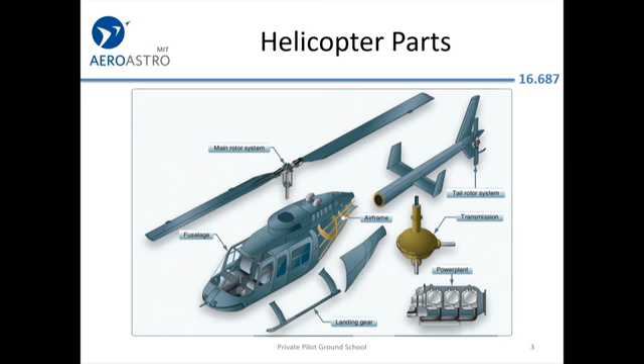You've got to have transmissions in helicopters. The speed of the engine is never the speed that you want, I don't think. And landing gear is kind of nice. Although for record-setting flights, sometimes people have taken them off to try to get a little higher or a little faster. And they just land very gently.

Okay, so your typical helicopter drivetrain will have transmissions for the main rotor, and they'll have another transmission to adjust the speed of the tail, maybe gear it back up a little bit. This unfortunately does introduce another source of unreliability. So in the airplane, you've got your engine, it's bolted to the propeller. As long as the engine's turning, it's hard to have a problem. The propellers don't generally just come apart in flight.

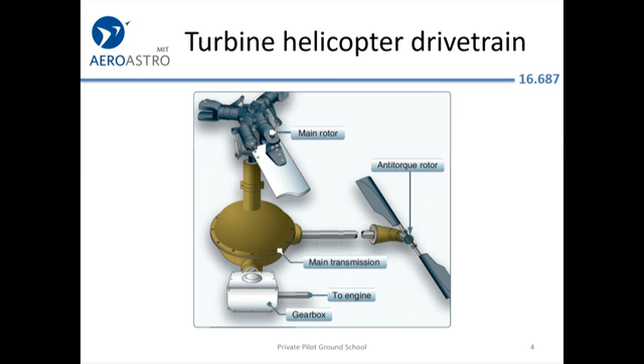But here with the helicopter, you might have a working engine and a working main rotor, and the transmission, all the oil might come out and the gears seize up. So there's a couple warning lights in there for when you're having a transmission problem.

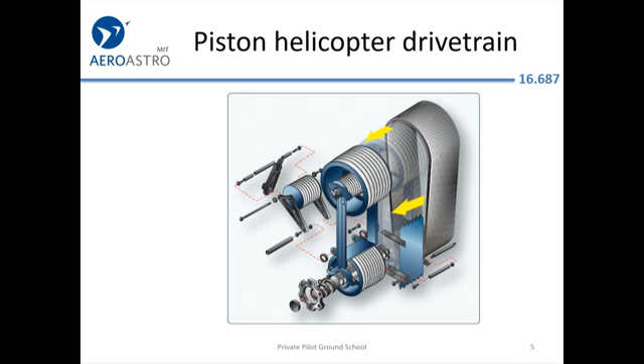This is the rubber belt system that's used in some piston helicopters. I think this is probably a drawing of a Robinson, but basically you have pulleys on the engine side and on the drivetrain side, and you have these rubber belts connecting them. So you can start your engine with the belts loose and then tighten them up when you want the engine to begin driving the rotor system. That way you don't have to have the little starter motor actually turn all the rotors and stuff.

All right, how does it work? So Tina is a hard act to follow with my cave person computer programmer's understanding of lift. But if you assume that lift is a combination of Newton's third law and the Bernoulli principle, that the sped up air has more kinetic energy, therefore, for conservation of energy, it has to have less of something else. It's going to have lower static pressure.

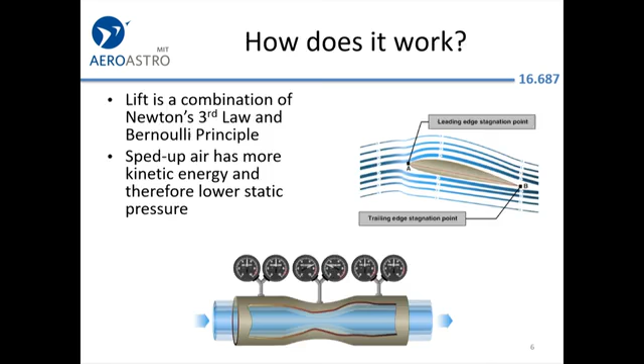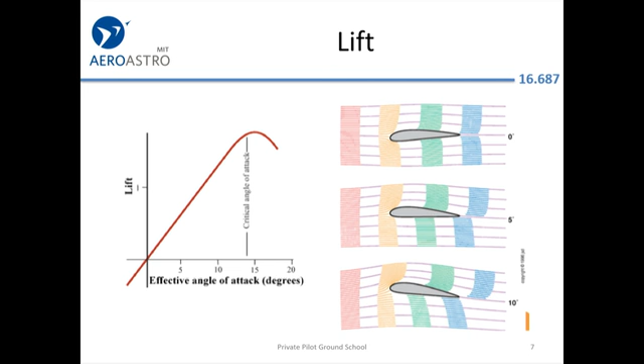This is the same drawing you saw earlier of how when you exceed a certain critical angle of attack, depending on the airfoil, your lift party comes to a quick end. It doesn't go away completely, but it's a sudden drop.

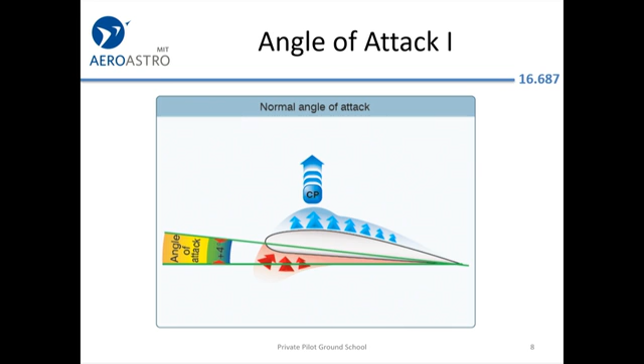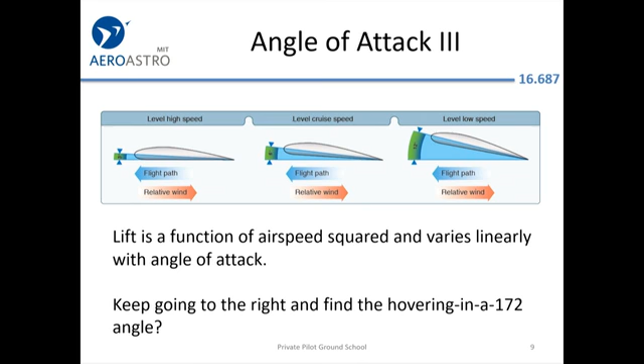Angle of attack. So remember, there's your chord line, there's your relative wind, a 4-degree angle of attack and a reasonable amount of forward speed will have you going. Remember, the lift varies as the speed squared. And if you want to fly slowly, you just go to higher and higher angles of attack. So why not hover in your Cessna 172 and save yourself the trouble of getting a helicopter rating? It's because, off the right end of this chart, you quickly get to the stalling angle of attack, and the plane doesn't fly anymore.

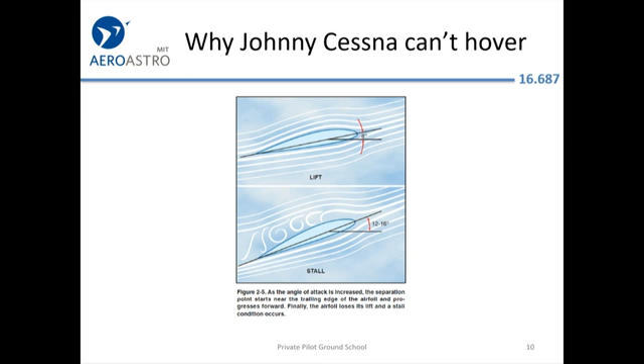All right, what if you saw the wing off the Cessna and spin it around? If you do that, the wing will always have airspeed, even if the fuselage is not moving. And that was an idea that was first reduced to practice in 1907. So only 4 years after the Wright brothers flew, a couple guys in France were actually hovering a little bit in a helicopter.

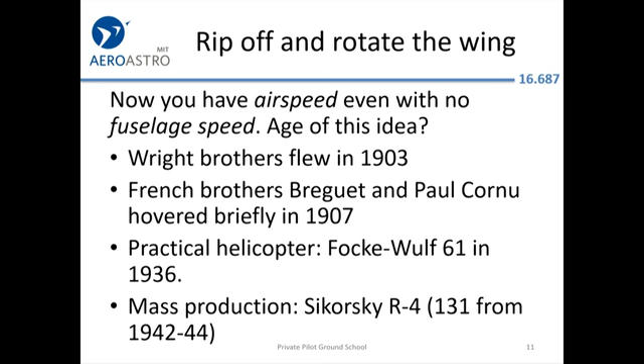The first helicopters that could be flown and controlled and actually operated as a practical aircraft, I think mid-30s in Germany. And then Sikorsky is famous for being the first mass producer of helicopters with the Sikorsky R4. It was used for a few operational purposes in World War II, search and rescue type stuff. But really, the Korean War was the first time that helicopters were widely used by the military.

All right, let's talk about very simple qualitative physics here. We're spinning on the ramp and we're hovering. We're spinning on the ramp. So we spin the rotor system up to 400 RPM, but we're still on the ramp. So does anybody have a brilliant idea for how do we get up into the air where we want to be? If we're not going to increase the RPM, change the pitch of the main rotor system.

Okay, excellent. So what's your name? Aziz. Aziz has a correct observation that if you want to get the same lift out of a wing without changing the speed, we don't want to speed up too much because the tips will go supersonic and the neighbors will begin to complain. So we just twist the blades up a little bit, and as they're twisted up, they'll bite more air, generate more lift, and the helicopter will begin rising up.

What will happen to the speed? Let's hear from one of these aero engineering heroes. As we generate more lift, what happens? You now have more drag on the rotors, so the engine will slow down. More lift, more drag. So without adding more power, the blades will slow down. So you want a correlator.

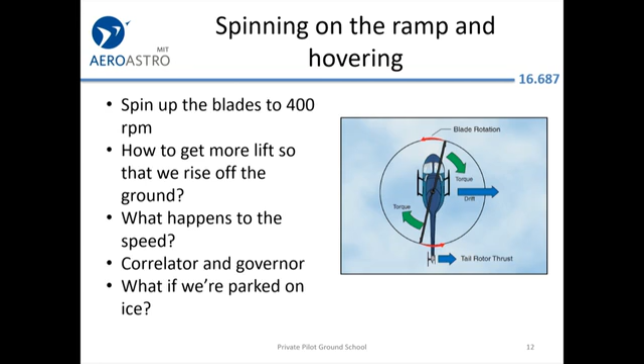And the only thing here that's not corrected, you'll notice, is the tail rotor thrust. So if you set everything up the way you would think obvious, like put the rotor mast straight up and put the tail rotor on it, the whole helicopter with the controls neutral would drift to the right from the tail rotor thrust, because it's pushing the tail. The helicopter wants to rotate that way. The tail rotor blows it back this way, and that would blow the whole machine off the side of the ramp if the pilot didn't hold a lot of left cyclic. So to counteract that, the helicopters are rigged with the mast at a slight left angle so that they don't have this tendency to go off to the right.

Interesting question. What does the governor do? Okay, yeah, so let me reinforce that. So yes, as you generate lift, you get more drag, which will cause the blades to slow down. So there's a mechanical correlation: as you're raising the collective, the throttle's being opened just kind of blindly, and the governor is touching that up. The governor is watching and maybe twisting the throttle control slightly to fine-tune the throttle to keep the blades exactly at 400 RPM. Let's say that's the 100%.

For a pilot, you don't want to distract the pilot too much, so the gauge is just calibrated in percent. It's 100% RPM, that's good. That's all you need to know about your helicopter. I think in the Robinson it works out to pretty close to 400 RPM.

All right, forward flight. So we're hovering, and we want to go forward. So it seems obvious that we want to tilt the fan, right? We want to push the fan down this way, and that way we'll get some horizontal vector of thrust, and we'll be going forward. But where do we push it from, right?

It's a spinning gyro, so it has a lot of stability. If we're really strong and we reach up from our pilot seat and try to nudge the rotor system, why wouldn't that just cause the helicopter fuselage to move underneath the fixed rotor system instead of moving the rotor system? There's nothing to fix unless we can call up an incredibly strong friend and say, hey, would you mind holding the helicopter in a fixed position?

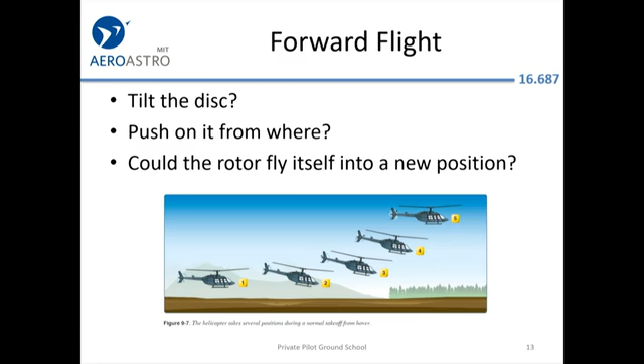You increase the angle of attack of the blades on one side to produce more lift on that side. What's your name, sorry? John? John has a good idea. So John says, increase the angle of attack and decrease it as the blade moves around the disc. So if you can increase the lift on part of the disc compared to another part of the disc, it will naturally tilt itself. So if you want to go forward, let's ignore gyroscopic precession for a moment, because I think we've proven that nobody understands it.

Let's just say that we could make the angle of attack higher on the back of the disc compared to the front. Then the back of the disc would have more lift. It would rise up, and the front would go lower, and then you would see this flight path that you do see. That makes sense? So basically you're flying the rotor system. You're not flying the helicopter. The helicopter's just hanging from the rotor system. That's a good mental model.

And all the power is from the engine to the rotor system. So that's a natural place to do it, just by tweaking the blade angle as it rotates around. So left hand is collective, moving the blades' angle regardless of where they are on the disc. And the cyclic, which is changing the pitch cyclically, as is suggested. All right, what's the magic? This design, I'm not sure it's really changed at all since the very first helicopters. Maybe those brothers in Paris didn't have one in 1907, but I'm pretty sure that every helicopter since then has had this. There's a swash plate.

Oh, watch this. So the lower part of the swash plate here is fixed and connected to the flight controls. And then there's a bearing, and the upper swash plate rotates with the blades. Does that make sense? So if you lift the lower swash plate up, that pushes the upper swash plate up, which pushes these rods that are connected to a corner of the blade, and that'll cause the blades to tilt. That makes sense? So you have this rotating swash plate that's connected to a corner of the blade, and if you push the whole thing up by yanking up on the collective, then you can see the blades actually twist. You can do that in the hangar and see the effect of this.

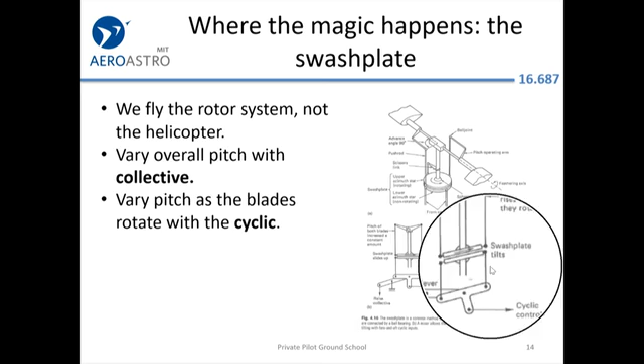At the same time, in your right hand is the cyclic, and with the cyclic, you're tilting the swash plate. So with a tilted swash plate, that will just cause the blades to twist up and twist down as they rotate. So it's a pretty elegant solution. This is not carrying much of the load of the helicopter. There's still a mast holding the whole thing up. This really just has to carry enough force to twist the blades up and down, up and down, up and down. So that's your engineering design. Everybody appreciates that? Okay.

But if you are, let's say, up at 200 feet at 0 airspeed, so you're just parked hovering 200 feet above the ground, you don't have huge stores of forward speed, which is kinetic energy, or potential energy, because you're only up 200 feet. So it's going to be hard to do an autorotation that's perfect and doesn't bend anything, especially because the FAA says if you're up high like that and the engine quits, in test piloting, you have to sit there with your arms folded for 1 second and do nothing, because that's what would probably happen in real life.

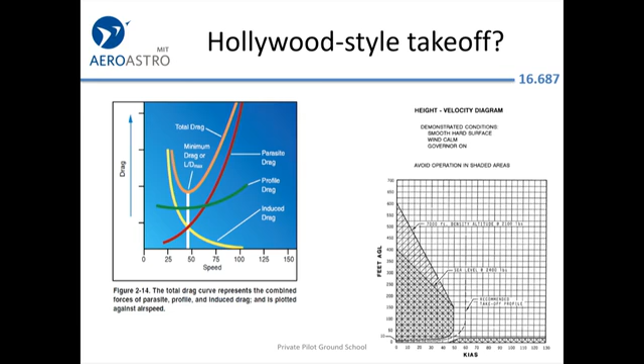All right, so what we're actually recommended to do, see this recommended takeoff profile, is skim along the ground until we get up to about 45 knots and then let the helicopter climb. I think this is the curve for a Robinson R-44. Why would you want to do that, aside from safety? Well, another good reason is you watch these drag versus speed curves, and you see that you reach kind of a minimum. This is some generic helicopter from an FAA book. It's actually 55 knots for the Robinson. But if you can go 55 knots, you need less energy than any other airspeed.

So the idea for a takeoff is you nudge the helicopter forward a little bit. If you can build up 2 knots of speed, that gives you excess power. You can use that excess power to climb up 3 inches, or you can use that excess power to accelerate maybe to 3 or 4 knots. And if you just keep accelerating, using your extra power to accelerate, the faster you go, the less power you need. So even if you've never touched the collective or drawn any more horsepower, as long as you have an open area in front of you, you'll accelerate.

And once you hit 45 or 55 knots, your hover power turns into significant excess power that you can use for a climb. So that's why you often see helicopters at airports taking off kind of like a short field airplane, and also landing a bit like a short field airplane.

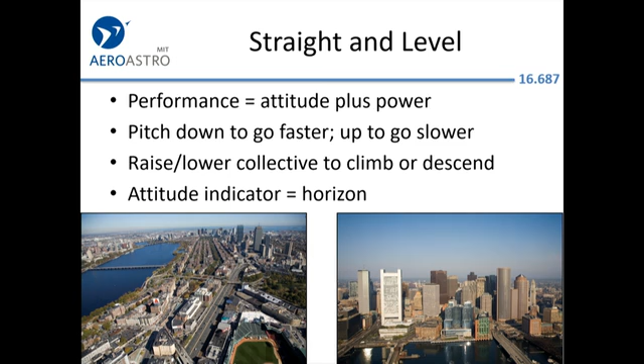All right, straight and level, it's very similar to an airplane. The performance is a function of the attitude that the aircraft is in. Is it pitched up or down? And how much power is being applied. And that's an indirect function of the collective position. So as with an airplane, remember your pitch controls your speed, and the amount of power, throttle in the airplane, collective in the helicopter, determines whether you're climbing or descending at that airspeed.

Your attitude indicator in a VFR helicopter is the horizon. So you're watching the horizon carefully. That's the reason why instrument-rated airplane pilots jump into the helicopter and can fly it immediately, and people who've never flown have a tough time. It takes them 10 hours. The reason is that instrument-rated airplane pilots become very sensitive to watching for small changes in attitude.

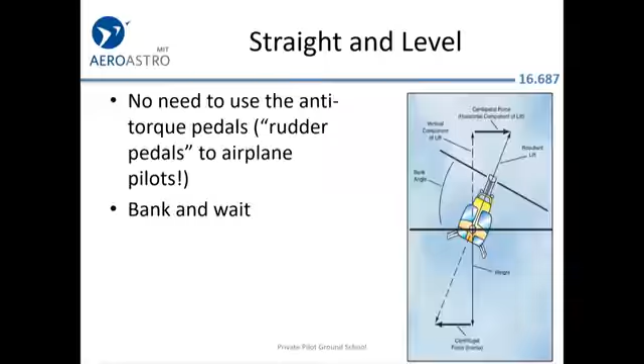All right, the anti-torque pedals. Remember, we had that tail rotor, and we adjust it so that the tail doesn't spin around on the ground. In the air, we adjust it so that the helicopter is streamlined into the wind. We don't actually have to use them to make turns. There's no adverse yaw, as in some airplanes, where it'll start skidding or slipping. All we do to make a turn is put the helicopter, using the cyclic, into a little bit of a bank, and then we wait. So if we have, let's say, a 10-degree bank, the helicopter in 1 minute will make a 180-degree turn.

Landing with power. So again, like an airplane, if you see the spot on the ground, you adjust the power so you don't overfly the spot or underfly the spot. If the spot's rising up in the windshield from your perspective, that means you're going to land short, so you add power, raise collective in the helicopter. If the spot is descending, then you're overflying the spot, so you have to reduce power.

Some people get a little bit ground shy in the airplane. Like they're happy flying 80 knots in the pattern, but they're not that happy flying 70 knots 10 feet above the runway, which makes sense because you don't want to slam into the ground going really fast. Well, the good news is in the helicopter, you never get to that phase where you're going fast close to the ground, because when you're landing, you just say, in my peripheral vision, how fast is the ground rushing by? And you just kind of keep that constant.

Whatever it was up at 500 feet above the ground, that's what you want when you're 5 feet above the ground. And you'll very naturally slow down. Your natural instinct to slow down as the ground begins rushing is a helpful one in the helicopter. So your peripheral vision is used for speed reference, and the spot moving up or down is used for a descent rate reference. And you never have to look inside at the gauges except when you're landing on top of an office building or something.

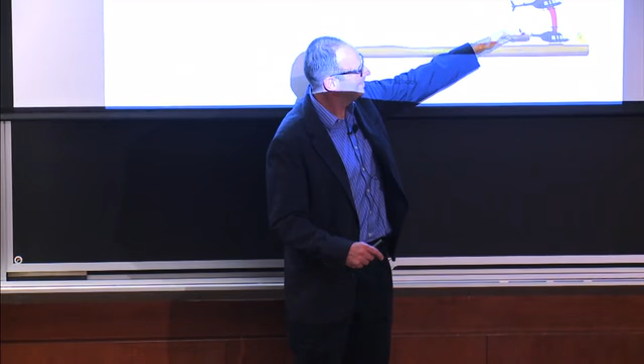So what you can do is stick forward and settle by pulling up on the collective. So you stick forward to level the skids, and then when you're about 5 feet above the ground, or maybe 2 feet above the ground, you start pulling up on the collective to cushion your fall for that last few feet. So you've used up potential energy, keeping the blades windmilling.